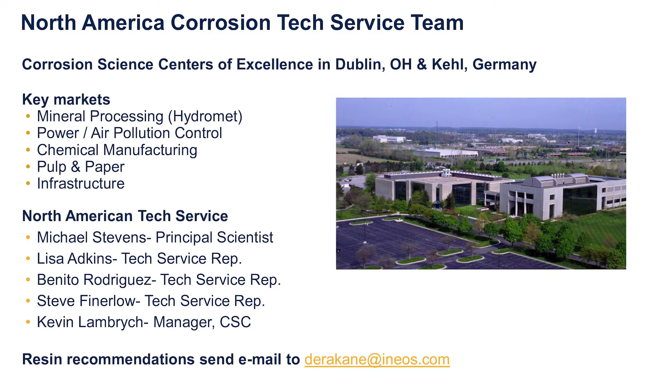So as mentioned, I manage the Corrosion Science Center, which is located in Dublin, Ohio, just outside of Columbus. And we focus on key markets: mineral processing, pollution control, power, that type of stuff, chemical process, pollution control, different types of chemical manufacturing applications, pulp and paper, infrastructure. And our key product line is Derakane, epoxy vinyl ester resins that go into the corrosion applications. And our Derakane corrosion guide really is kind of the hallmark of the industry for guidance into using FRP in a number of different corrosion applications.

My team is made up of Michael Stevens. Probably a lot of folks in this room are familiar with Mike. He's been around for about 45 years, just a walking encyclopedia of FRP knowledge. So if you run across something obscure, feel free to reach out to us. Chances are Mike has probably seen it at least a couple times, if not 4 times.

Lisa Adkins is also one of our technical service representatives. She's got about almost 30 years behind her. She just does a great job. She does a lot of the management of our resin recommendations that go out into the industry.

Benito Rodriguez is on the West Coast. He manages the corrosion and fire retardant product lines there. Steve Finerlow is a tech service rep out of Columbus, Ohio. So he manages a lot of the activities around that area, and then also manages a lot of the work that goes in and out of our laboratories.

A lot of the product development and tech service laboratory work that we do. And then I'm the manager. So my background is in polymer chemistry. I've been with INEOS going on 21 years now, I think so. Well, Ashland originally, and then INEOS.

You will have seen too, there was the Hetron product line that Ashland used to have. And by and large, it's important to note that the important resins from the Hetron product line, the Hetron 980, the 980-35, those resins all were rolled into the Derakane product line because they were unique. Hetron 922, very close to 411. So Hetron 922 has pretty much been obsoleted. That's just some of the background of what we do and the products that we work with.

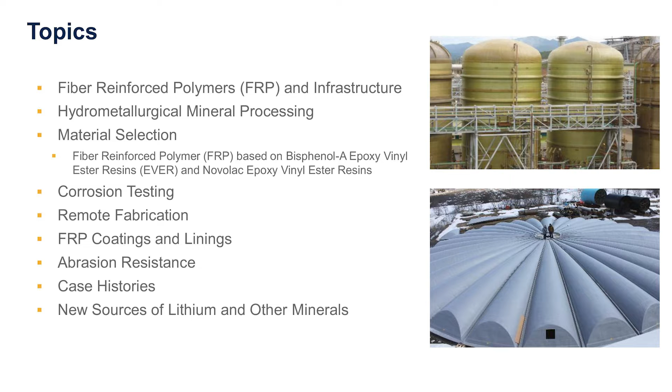And so as mentioned, I'm going to go into a little bit of FRP 101. I'm going to talk about the hydromet process because it really is an interesting process in that it lends itself perfectly to fiber reinforced polymers. The types of chemical environments, acid chlorides, oxidative environments that alloys struggle with are really ideal for FRP.

How we know which materials work, how we conduct corrosion testing. A great aspect of FRP is its ability for easy remote fabrication, quote unquote easy, but remote fabrication of very large vessels. How we deal with coatings and linings, abrasion resistance, just a few of the case histories that I mentioned to give you an idea of the scale of the equipment that's out there in the world.

And then talk about lithium. So where FRP kind of falls in, as you look at this scorecard, the infrastructure scorecard that came out of the recent Infrastructure Investment Act. And by and large, composites have a role throughout all of these applications.

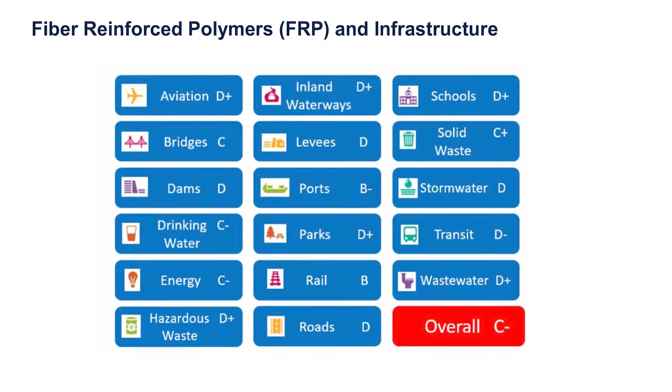Water treatment, energy, hazardous waste management, pollution control, and then as mentioned, upcoming roles in power production and lithium harvesting. But overall, we didn't really score too well. But composites really have a role here to help make things better. You're going to see a lot of composites going into infrastructure applications, and then, of course, as you all know, a lot of corrosion applications.

So as we look at the hydromet process, by and large, what it is, it's an aqueous chemical processing environment.

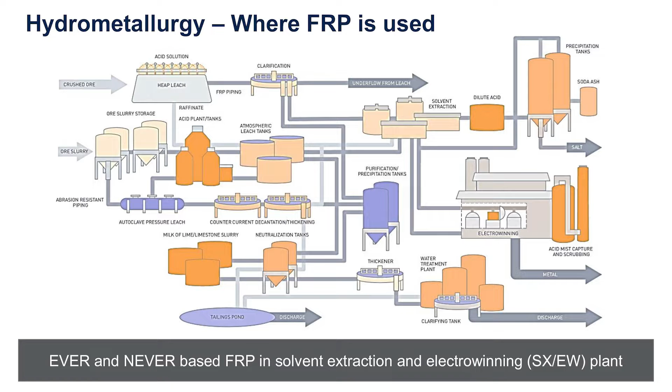You start out with crushed ore, so all the mining that happens where the ore is brought up out of the ground, it's typically piled into a leach pile. Essentially it's a mound of rock on top of some type of membrane, and then they trickle acid down through that. It'd be sulfuric typically.

And there's typically an acid plant right on site that produces that acid. So the heap leach has the minerals that you're after extracted out of it, and then that goes into a clarification process. You're going to see some rather large countercurrent decanters, that type of stuff, in the next couple of slides.

You see there's a number of different tanks, purification precipitators, pollution control. In the case of something like copper, typically there's an electrowinning process, so those electrowinning cells are typically made out of polymer concrete. So a number of different roles for corrosion-resistant resins across the entire production process, not to mention all the miles of pipe associated with this.

And again, these are all acid chloride type environments in the case of heap leaches with hydrochloric acid. And then there's a number of different washing steps that could have caustic chemical environments too, where FRP also does a really good job.

So when we talk about the challenge of corrosion, as you look at it, really everything would be carbon steel if it could be, because it's inexpensive, great strength, easy to process, easy to recycle, all of these different things. But it doesn't do all the things that we need it to do.

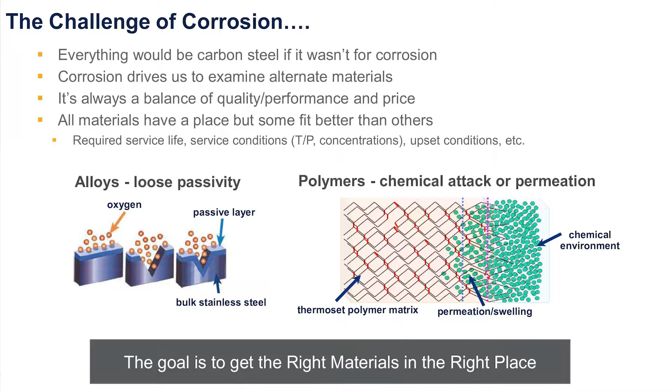So over the decades, alloys have been developed. By and large, the metals - how they work is you have your metal substrate and they develop an oxidative layer, and that layer is called the passive layer. That oxidative layer forms and protects the underlying metal substrate from further corrosion. But over time, you have a loss of that oxidative layer, and then it regains - it's lost, and this is known as the loss rate.

So engineers are typically very familiar with loss rates, but they're not familiar with fiber-reinforced polymers, because really you only get a brief chapter on this in a number of different education series. Even me as a polymer chemist, we touched on FRP for just like a month, and even that.

And so what we have with polymers is they either work or they don't. They're either compatible with your chemical environment, or they're going to be degraded relatively quickly. And a lot of what we do at the Corrosion Science Center is really understand what this phenomena is.

As you look at the polymer network, you can have a little bit of permeation that occurs, and how we govern that and how we design those corrosion barriers is by and large what we do.

We really are not involved at all in the underlying structural layers. That's more for the engineering teams to focus on. It's a little bit outside of our wheelhouse. We're just a bunch of chemists.

But at the end of the day, what we're trying to do is identify the right materials to be used in the right application. We're not trying to displace alloys or metals where they make sense. We want to make sure that FRP is used where it should be used, so that we don't have failures, so we don't get black eyes. That's really our goal here.

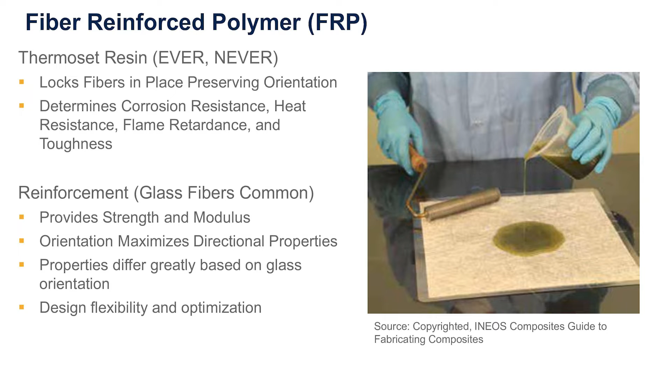So when we talk about fiber-reinforced polymers, really what we're talking about is resin and some type of reinforcement. Typically it's glass reinforcement - I'll get into more details about the types of materials in future slides. But what we look at is the thermoset resin, typically for corrosion applications an epoxy vinyl ester resin or Novolac epoxy vinyl ester resin.

The Novolacs have higher resistance to acids and oxidative environments. They also have higher temperature performance, but they have a downside - they don't handle caustic environments as well as the regular bisphenol A epoxy vinyl ester resins. But it is the matrix that really determines the corrosion performance of the composite material.

And then it's the reinforcement that we rely on for the strength and reinforcement of the corrosion barrier, and also the construction of the structural layers. So as we look at the different types of materials available, we essentially produce 3 families of thermoset epoxy vinyl ester resins, and essentially they are typical epoxies.

If you had an epoxy amine system, like a glue from the hardware store, you'd have one clear tube, typically your epoxy, and another brown tube, your amine. Well, what we do is different - we don't use an amine cross-linking agent. Instead, we utilize methacrylic acid to build these polymers. That means we can use what's known as a free radical polymerization process, which is very flexible and an easy chemical reaction to get consistent mechanical properties.

Ultimately, with a thermoset resin like our epoxy vinyl ester resins, as long as you cure it, it doesn't matter how you got it cured - it could take 15 minutes or an hour. But by and large, the rule of thumb is as long as you cure it, you're going to guarantee a minimum performance level from both a corrosion performance standpoint and a mechanical property standpoint. So that's an important thing to realize.

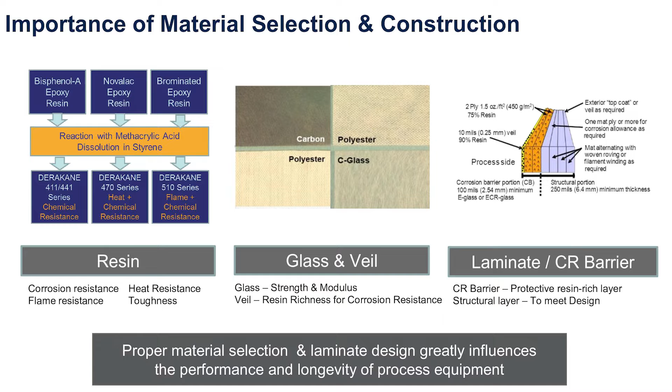Also, carbon might be used in a hot caustic or hot acid chemical environment - they typically perform very well in those applications. For other lower temperature caustic type applications, you'll typically see a polyester veil, and Nexus is typically what you're seeing out there. That polyester veil is very good because it's resistant to caustic attacks. It also performs well in hydrofluoric acid type applications, all that kind of stuff.

All that information is in our corrosion guide if you're interested. But by and large, the big workhorse of the industry has been C-glass veil over the decades. Recently we've seen Owens Corning exit the North American C-glass veil market, which was kind of interesting - I don't really know what all the issues were there.

I think there was just a need for them to phase out, and they began to focus more on their ECR glass veils called the Advantex veils. That was a hot topic last year. I think we're kind of over the hump of that big concern a lot of folks had with that change out of the veil in the industry. But by and large, C-glass veil is the main workhorse.

When we talk about a corrosion barrier, typically it's the first 100 mils on top of the structural layer at minimum - it could be bigger than that. What you have is your veil layer, about 10 mils thick, and that layer is about 90% resin. So it really does all the job of protecting the underlying structures from the chemical environments.

And then what you have next is chopped strand glass mat. What you want there is discontinuous fibers - you don't want corrosion to be able to attack a single strand of glass and travel throughout the composite, rapidly degrading the performance of the composite over time. So the chopped strand glass mat combined with the veil really is what the corrosion barrier is.

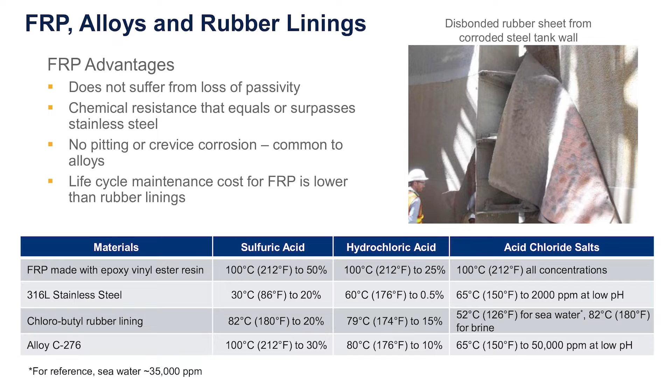So as you look at FRP and corrosion performance versus alloys, really what this slide is telling you, the take-home message is that acid chlorides, acids really are something that FRP made with epoxy vinyl ester resins handle quite well, much better than something like a 316 or a C276. And so at the end of the day, that's the reason why FRP materials really have become the material of choice for acid chloride type environments.

Another area that you'll see is where rubber linings might be used in place of an FRP type material.

The challenge with rubber linings is they do a great job, but what you have often is a carbon steel vessel with a rubber lining on it, and that lining is only so thick. If something were to penetrate that lining, you now have the chemical environment going across it, and the carbon steel substrate exposed to a chemical environment it's not suited to deal with. So you see rapid corrosion and degradation of the tank wall behind the rubber, and you wind up having disbondment of the rubber and failure of the vessel.

Over the past decade or so, we've seen a lot of folks replace these rubber linings with FRP, because it's often a challenge to get the same type of shop application of a rubber lining in the field as you do in a shop-controlled environment.

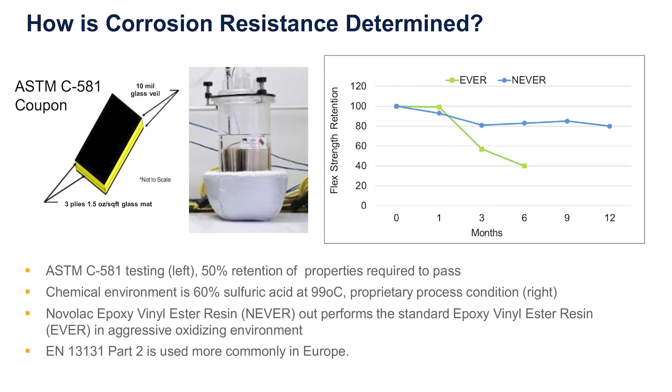So how do we know how this stuff is going to perform? We actually do empirical studies, corrosion resistance evaluations. What you're seeing here is a reactor in our lab with ASTM C581 corrosion coupons. There's a method for making these coupons, a standard that's been out there for a long time.

By and large, what they're meant to do is simulate the corrosion barrier on the wall of the vessel, but from both sides. So you can totally submerge that coupon in the chemical environment and monitor its degradation or change over time - change in appearance, barcol values, hardness values, change in modulus, flex retention, is there wicking occurring, can you see fiber prominence over time. All of these are aspects of that test method.

In this case we're looking at flex strength retention. This was for a pretty aggressive chemical environment, 60% sulfuric acid at 99C. That's pretty chemically aggressive - that's not something we recommend. This was a specialty corrosion study for somebody with a specific chemical environment, so you're not going to see that in our guide. I just want to make sure you understand that.

But you can see the epoxy vinyl ester resins are really good workhorse corrosion resistant resins. The Novolac epoxy vinyl ester resins have more resistance to temperature and to oxidative environments, and you can really see that shine in the data. The first month they're doing okay. By the third month, we start to see a big difference in the performance of the epoxy vinyl ester resin versus the Novolac - the Novolac really just did okay in that application, where we had to stop it. So this would be like a 411 versus a 470 here.

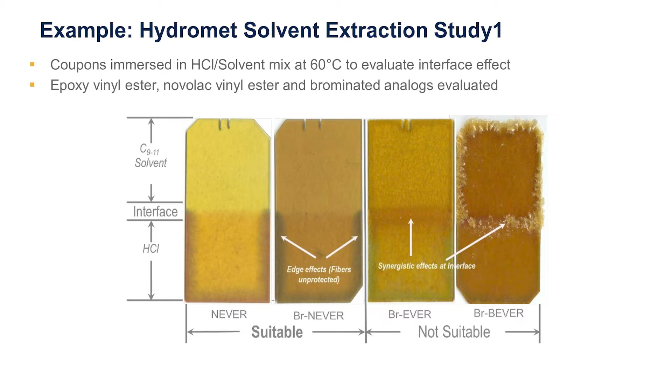Here's a great example of something that's kind of unique - this is a solvent extraction study we did for the Goro Nickel project, starting way back in the early 2000s. In that extraction process, you have aqueous and solvent chemical environments combined in one application. The goal is to dissolve your metal salts in the water, then use a chelating agent that can be extracted by the solvent to pull the metal out of the water into the solvent, purifying it from all the other materials that came along from the extraction process.

So what we have here is the hydrochloric acid, then the solvent layer, and then you have this interface.

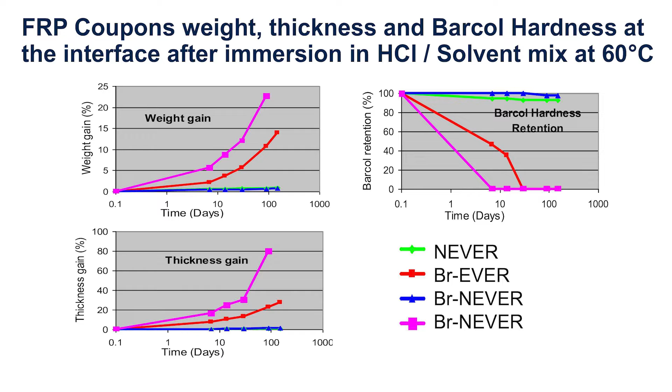So what we were looking at was trying to understand which material is going to perform the best. What we looked at are Novolac epoxy vinyl ester resins versus regular epoxy vinyl ester resins, and we looked at to see if the brominated analog would do well.

The brominated analog is the same polymer, so 411 with bromines attached at strategic places on the polymer backbone is the Derakane 510 series of resins - the 510A, B, and C. That bromine, right where it is, sometimes prevents specific chemical attacks in these types of environments that give better performance. We have a whole paper on just talking about how a brominated resin performs better in hypo service versus a non-brominated one.

So we were trying to figure out which material was going to be most suitable. In this case, what we found was that in all the key factors, the Novolac-based materials, the brominated analog and the regular Novolac, perform much better for this solvent extraction application specifically.

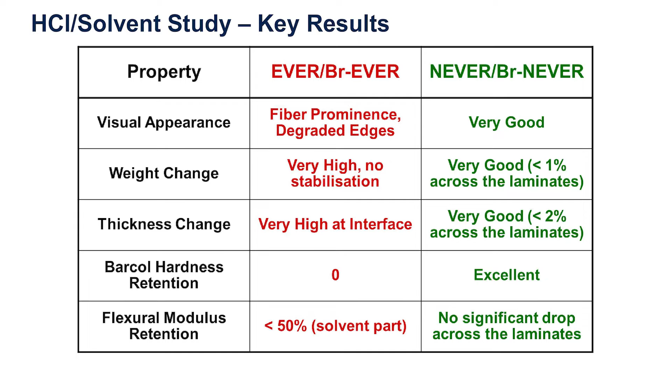These are different attributes that we wanted to know, that we use for our measurement of performance. You can see that the regular vinyl esters didn't do well, the Novolacs did much better. And then eventually, that's what led to the recommendation of the 470 family for these pulse extraction columns.

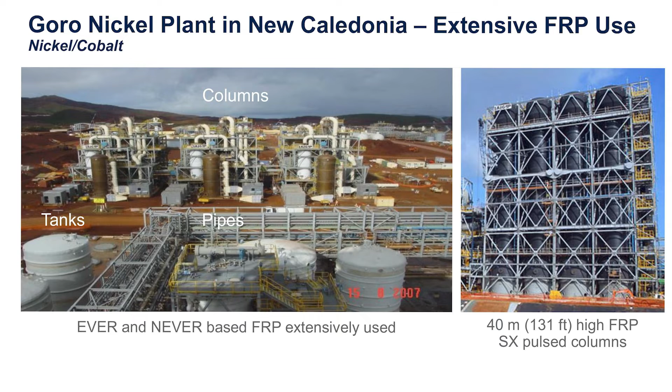I won't get into all of it - there's a lot of ins and outs on this project because it was one of the largest scale ones. I think probably there are five people in this audience we could spend two hours talking about just this project. So a lot of horror stories, but a lot of victories too at the same time.

Chemical evaluation in our laboratories led to this real world example of brand new technology - this is the first pulse columns that were ever out there. This is to win mainly nickel, but other metals as well.

And on top of that, you see all types of other process vessels that are made out of FRP, just because of its suitability for the reagents used in these chemical extraction processes.

So now let's switch gears a little bit and just talk about the versatility of fabricating with FRP.

A lot of what folks do - if you're having a piece of equipment constructed for you, you're going to typically hire an independent inspection firm, like the fine folks that have put on the show here. Those people are really going to be your eyes and ears in the shop, because that's what they do every day. If you're a plant engineer, you can't be expected to be an expert in fabrication of FRP - if you can, kudos to you. But the best thing is to really have somebody go in there who knows what they're doing.

Now, a typical fabrication method for pipes and vessels is filament winding. What that is: you have your glass reinforcement. First you build your corrosion barrier, typically by hand, on the mandrel. Then you have your glass roving that goes through a resin bath and then wraps on the mandrel.

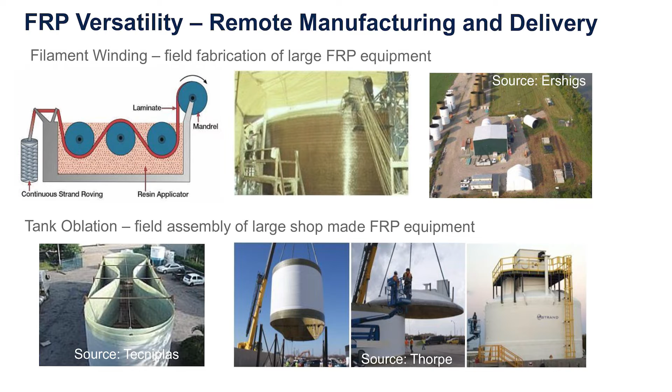A twist on this is tank oblation. Tank oblation is where you build the walls of the tank in a shop environment, so you get much better labor costs and good quality control. You build all the walls for the vessel in the shop, put them on a flatbed, oblate them, and nest them inside of each other. They arrive at the place you want to erect your tank, you allow them to relax back to their original shape, and then you bond them together, and then you have an almost shop quality vessel rapidly assembled in the field.

It's a little bit more cost effective because, as you imagine, sending all that remote labor is a lot of money. You have to ship all your materials to a place, but it's pretty cost competitive versus other techniques for building corrosion resistant equipment.

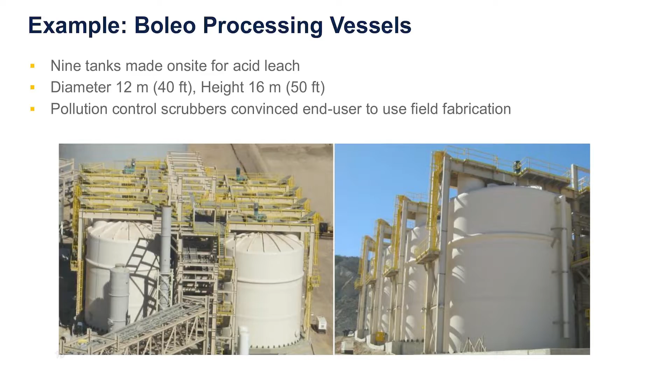Another great example: these are the extraction vessels at the El Boleo mineral processing facility in Baja, California, Mexico. These were all fabricated on site, all with abrasion resistant liners. These are processing sulfuric acid with rock slurry to try to win the metals.

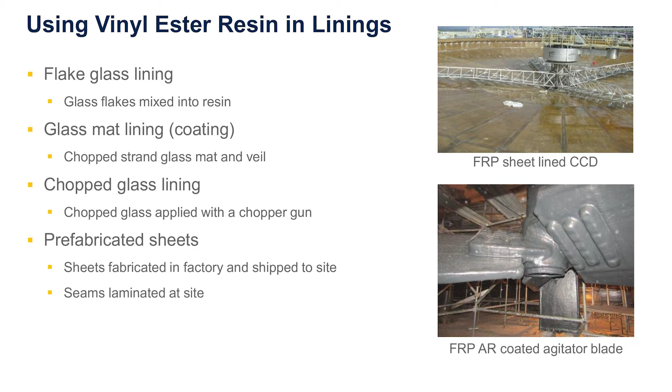Just amazing. Other things, vinyl ester resins are used in a number of different lining applications. There are entire companies that produce linings and coatings based on our epoxy vinyl ester resins.

This is an example of a sheet line vessel - actually a free floating liner in a large countercurrent decanter. In this case, the vessel itself is quite large. They shipped all the panels together, and then assembled them at the site to build this large vessel. Jet's going to go into this type of technology in a little more depth in the next presentation.

So abrasion resistance, that's often the challenge with FRP. If you have slurries, you have to worry about abrasion of the FRP. How we can achieve good abrasion resistance is by adding hardeners such as silicon carbide. We have a bunch of different abrasion papers that can help you understand whether you need an abrasion liner or not - feel free to talk to us in more detail about that.

There are also a number of types of linings. We have a little primer on how to line a metal vessel. It's not meant to be the only thing you need to do it, but it's a good primer to understand how you go about doing this stuff. Feel free to reach out to us for that information.

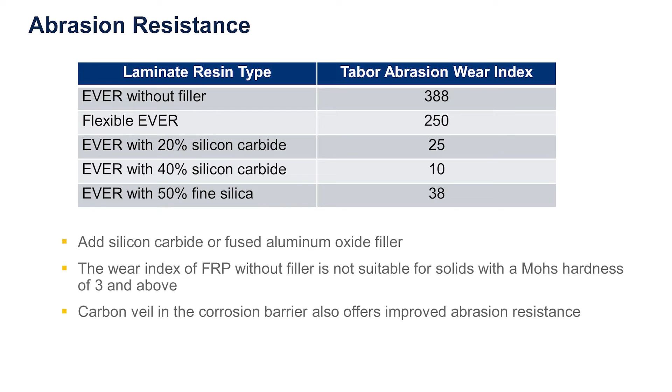We've actually done a number of studies over the years to understand what concentrations of silicon carbide, or say fine silica, are going to give us the best performance. There's a little trick to fabricating with these materials, so there are some things to understand before you prescribe this. If you need an abrasion liner, go ahead and request it, but if you don't, you really shouldn't, because it adds a little bit of a twist to the fabrication process.

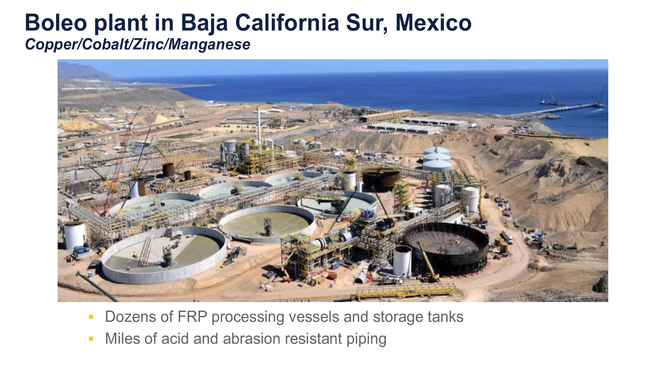Here's the example of the Boleo project - just look at the scale of this equipment. That's the loose liner and the CCD going in. Just amazing equipment. Over here you have the extraction tanks we mentioned that were remotely fabricated, and the acid production plant over here.

Also, all of this process was designed to operate on seawater. If they had used metal to harvest the seawater for this process, they would have had ancillary corrosion issues with that metal. So just everywhere you see here, this is a lot of FRP.

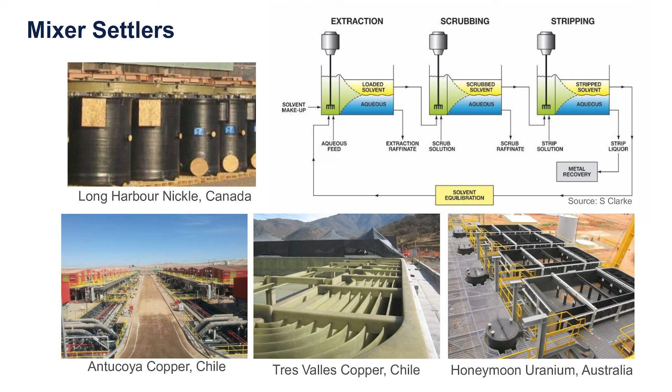Tons of mixer settlers - we talked about that, separating the aqueous acid environment and then getting the metal with the chelating agent into the solvent. That's what these do. This is a continuous process: mixing, decanting, purification, mixing, decanting, purification, until you go through the recovery. So a number of different applications out there in the world these days have used these with great success.

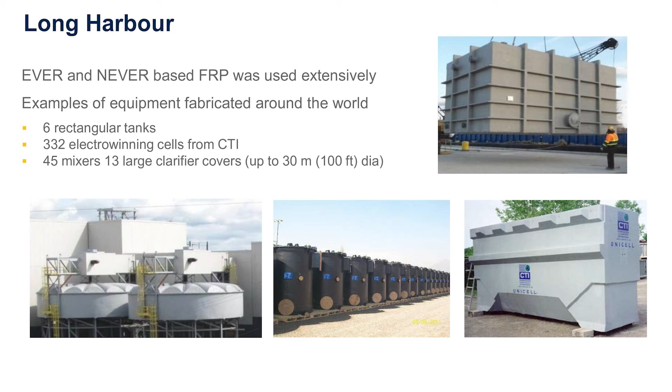Another case history is the Long Harbour project. Lots of FRP here throughout, these scallop covers on top of the clarifiers. The clarifier unit is a higher end purification that goes further down in the process after the countercurrent decanters. Electrowinning cells for winning of the nickel, and a number of different types of vessels, extraction units.

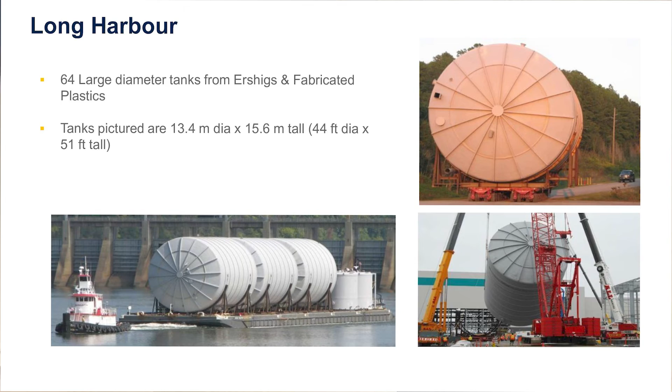Just some of the scale of the vessels that were shop made and shipped up there to Long Harbour. Pretty impressive. So the thing here for you engineers to realize is a lot of this has been done, so it's not a new thing. You shouldn't be that worried about whether FRP can work for your application.

So FRP and lithium, this has really been the hot topic over the past, I want to say, 5 years. A number of different firms out there literally send us a spreadsheet of an entire plant and want us to go through it and make resin recommendations. Five years ago we made a ton of these, and now, with this environment changing, we're seeing all this kind of turn on.

The Salton Sea application, geothermal power plants at the Salton Sea - for years these things were operating and nobody realized they were throwing lithium-rich brine back down into the earth that went through this plant. So now they're bolting on lithium extraction plants to the side of these power plants, winning lithium. It's said there's enough lithium at the Salton Sea for us to really get our lithium requirements up and going.

There are other folks looking at technologies using FRP to recycle lithium. What they're trying to do is get this lithium cycle going so you have winning of virgin lithium and then recycling of used lithium to keep the process moving forward to meet our energy needs. Pretty exciting. And again, how do we know what's going to perform in the right place?

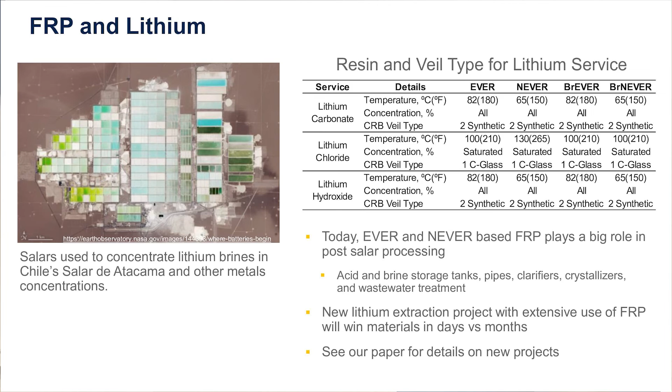We've done the corrosion studies already - lithium carbonate, lithium chloride, lithium hydroxide, different types of chemical environments. This is more caustic. By and large, we know for a number of these applications, if it's about 180 or less, typically Derakane 411 is going to be used. If it's over that, typically Derakane 470 is going to be used. But if you have a caustic environment at high temperature, you're going to want to look at Derakane 451, the old Hetron 980, because it does a great job. A really interesting resin there, which I won't get into in detail.

But what we're saying is that coming up in all the areas of lithium winning and recycling, FRP is going to be the material of choice because it's able to deal with that chemical environment perfectly.

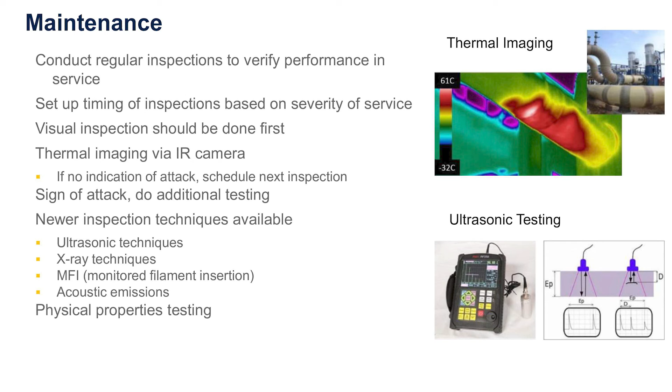Just a word on maintenance. We're going to see Tom get into some of this stuff. Thermal imaging is something a lot of folks use out in the field. I can't recommend this enough, it's just a great tool to use. I'm not going to steal anybody's thunder by getting into it too deep, but it just makes sense - get new equipment, take thermal images of it, especially pipes, where you have elbows, where you have process eddies going on.

You can see right there's been thinning. So if you want to inspect your vessel, where should you inspect it? Well, you probably should start by taking a look at that hotspot. Ultrasonic testing - not that hard to do. It's something you can be trained on, or you can hire an expert in that area. But then there's other techniques, some X-ray.

There's RFID, which I don't talk about here. That's something that's coming more online, where you look at degradation and you have an RFID device, like what you use to scan your credit card. If that degrades, once you lose your signal, enough corrosion has happened that it's penetrated into the laminate, killed your RFID sensor, and now you know the state of your corrosion barrier. A number of exciting things out there.

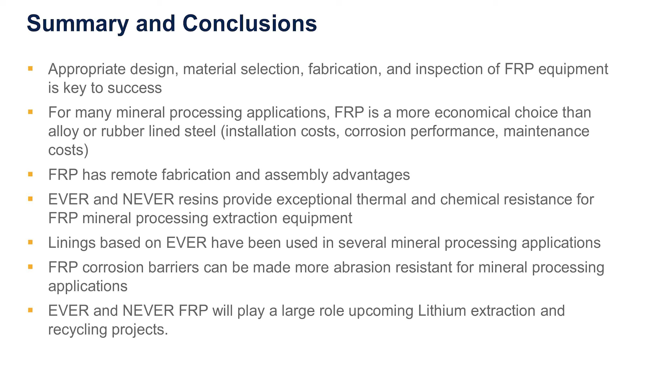So ultimately, what I hope I did for you guys was give you a little bit of an overview, kicking off this exciting forum that we have here for the next couple of days. I hope you found this information worthwhile. If you have any questions, please feel free to reach out to us. My colleague Joy Bennett is also here, and there are other folks who know us quite well and can refer you on to us. I hope you found this interesting, and thank you very much.